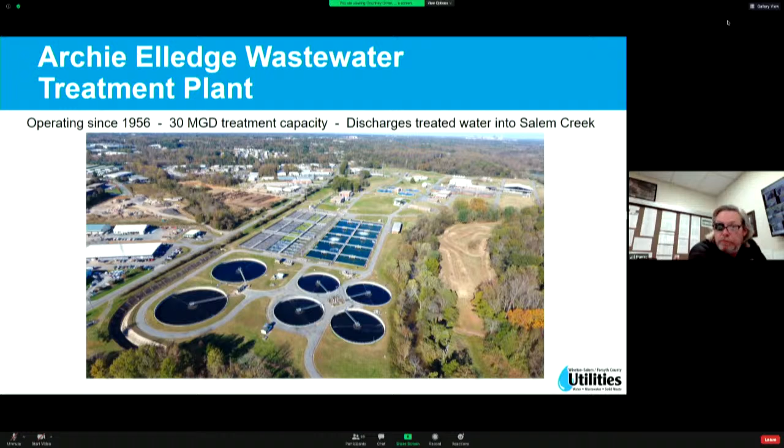The city has two wastewater treatment plants. The first is the Archie Elledge wastewater treatment plant. It's been in operation since 1956 and is currently rated for 30 million gallons a day treatment capacity, and it discharges into the Salem Creek Basin.

The other facility is the Muddy Creek wastewater treatment plant, and it's been in operation since 1986. It's currently rated for 21 million gallons a day treatment capacity. It discharges directly into the Yadkin River.

To talk a little bit about the wastewater treatment process itself, the very first step is what we refer to as preliminary treatment, and it has a couple of steps within it. The first is the bar screen. Just think about it as a bunch of bars lined up vertically in a row, and they catch rags, sticks, all kinds of debris, and an automatic rake will pull that out of the flow and dump it into a dumpster, because we don't want that kind of material moving downstream, tearing up pumps and other equipment. It's best treated by just carrying it, dewatering it, and carrying it straight to the landfill.

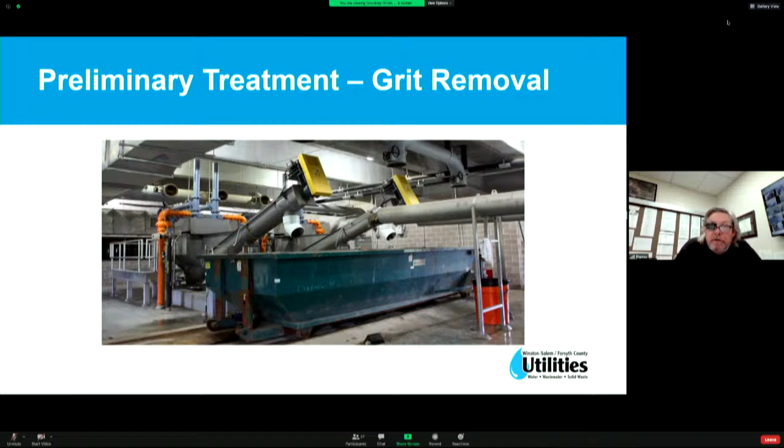The second part of that is the grit removal process, and we use a vortex grit system. Really all we're doing is removing sand, rocks, and inorganic material that passes by the bar screens that we want to get out, because it's also best treated just by dewatering that material, compacting it, putting it in the dumpster you're seeing on the screen, and carrying it to the landfill. After the preliminary treatment process, we go to primary clarification.

Just think about it as a big holding tank where we separate the solids from the liquids. The water that flows through these tanks is generally held for 2 to 3 hours detention time. From there, it will remove 60 to 70% of the total suspended solids, and ultimately about 40% of the biochemical oxygen demand. That BOD is what we use in the trades to determine and classify how strong the waste is coming into the plants.

So by removing with the bar screens, the grit channels, and then primary clarification, by this point we've removed 60 to 70% of the solids that you would see coming into the plant, which dramatically reduces the load on our aeration basin, which we'll talk about in a few minutes. These primary clarifiers also remove any floating oils or grease that come to the top of those clarifiers, and we're able to pull those out, thicken them up, dry them out, and also carry that material to the landfill as well.

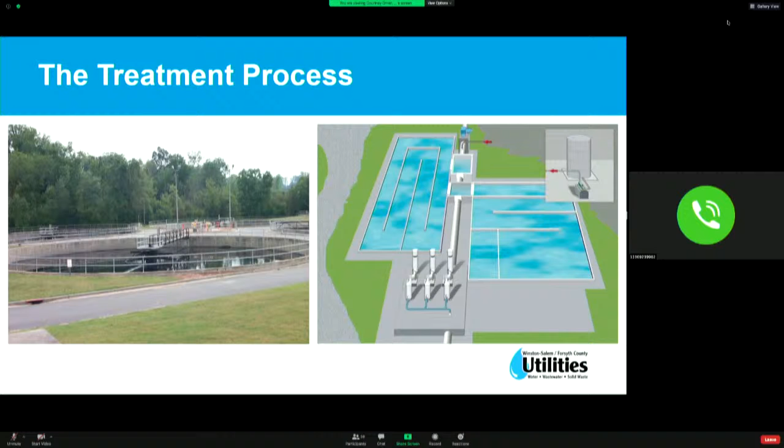So that is where the clear water, after it has been treated, would go to this chlorine contact chamber, where we would add hypochlorite as a disinfecting agent and allow it time to react with anything that may still be left in the flow. Then we will dechlorinate it with sodium bisulfite before we release it out into Salem Creek.

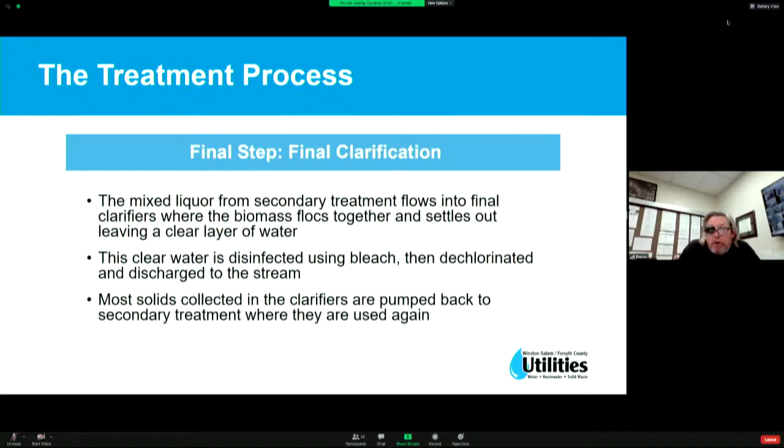That's kind of what we were just talking about there, the final clarification process, where those bugs are settled out and returned back to be reused.

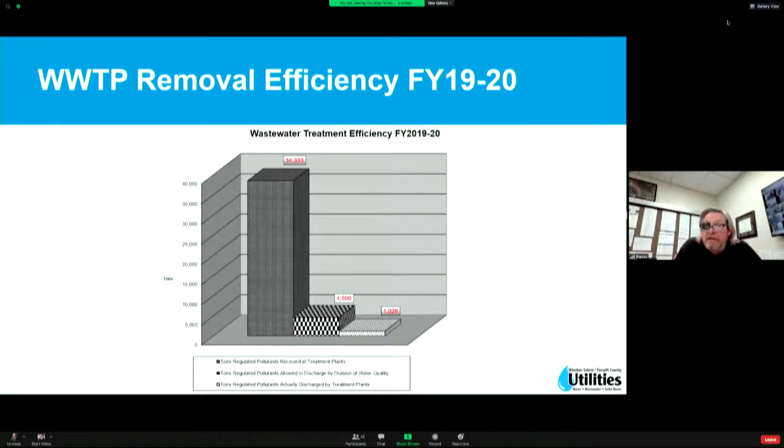Some of the side things we also operate here at the wastewater treatment facility. Of course, we have a biosolids drying facility, where all those bugs and materials pulled out are thickened in a centrifuge and then run through our regional dryer facility, creating a pelletized material which we use as a soil amendment to disperse pretty much almost all around North Carolina.

We also have several support groups. We've got a laboratory on site, and our chemists perform right at 160 chemical analyses each day, which help us maintain proper operations. We also use that information to report back on our state reports, which our lab department creates and submits as discharge monitoring reports, done electronically and kept correct. We also have our own maintenance department and electrical and instrumentation departments on site to help keep the facilities running correctly.

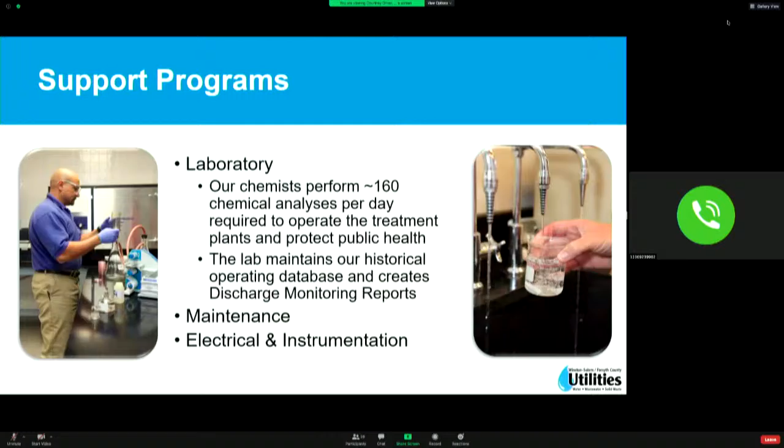The industrial waste control is another department we utilize here. They are tasked with issuing permits and monitoring the discharge from significant industrial users throughout the county, giving them permits on what they can and cannot discharge. They also administer and maintain the grease control program, which you may have heard about with the utilities field operations group. That's where we keep track of food service establishments throughout the county, meeting with them, educating them on the right and wrong way of what should and should not go down the drains, especially fats, oil, and grease, so we don't end up with lines clogging between their facilities and our treatment plants.

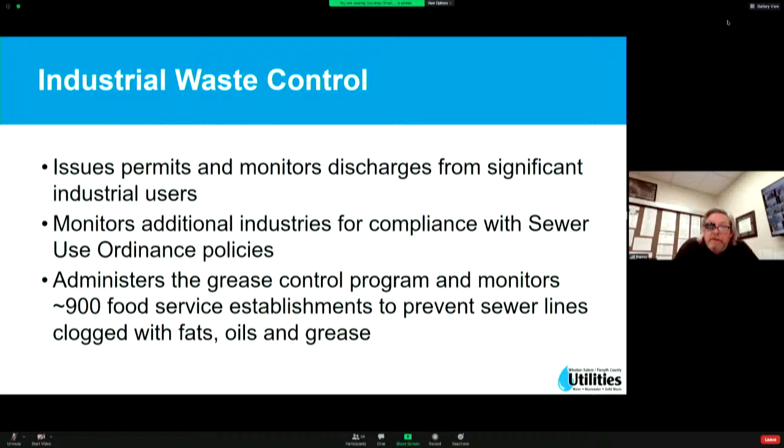Here is some of the educational material we distribute both to restaurants, and if we have a clog in a neighborhood, we will pass out door hangers. We've also gone to the fairgrounds and to a lot of the elementary schools, trying to teach the youth what the dangers are of putting things down the drain, hoping they will carry it home to their parents as well as learning it and keeping that in mind as they grow up.

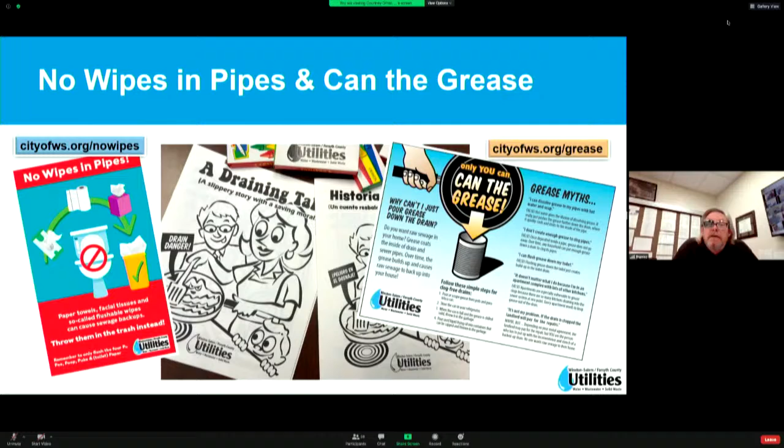Looks like I've spoken so fast, I'm going to get y'all out of here early today. So I think that is the end of my presentation, but I will be happy to take any questions or comments you may have.

Frank, this is Wesley. Where do the bugs come from?

The bugs are naturally occurring, and all we're doing is giving them the perfect environment to thrive and grow, just like a septic tank. Those bugs and organisms will naturally occur over time. So we just want to make sure we give them the right loading rates, the right pH, right temperatures, those type of things to keep them happy, multiplying, and doing exactly what they should, but they are naturally occurring in the environment.

Do you ever have a problem with them multiplying too much? Well, they only multiply based off of the amount of loading or BOD that comes into the plant, and that loading can vary dramatically. That's where our lab is so crucial, giving us results every day. We take that information and calculate the loading coming in and how much wasting we need to do, how many organisms we need to waste back out of the system to maintain proper population.

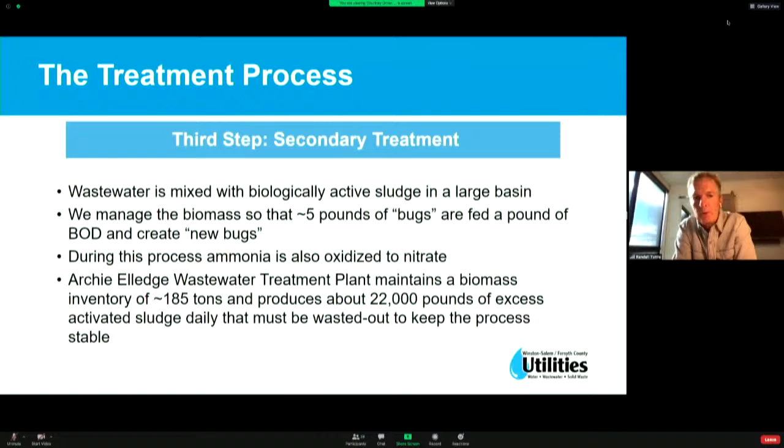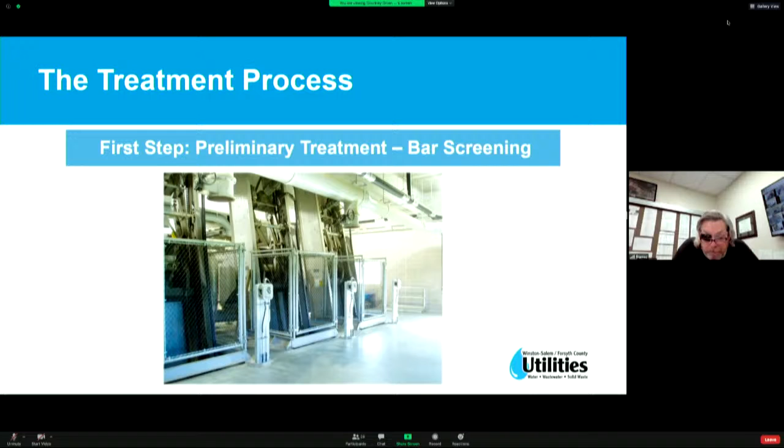So they don't mind being neighbors to us, is sort of my question. They do not mind, but we are getting a lot of new houses building up on that side, which I do anticipate will become more of a problem. I know, and I appreciate it because I'm the guy who gets most of the phone calls. I do appreciate the commission being willing to help us purchase some of the land, especially around the Elledge plant, to prevent or reduce apartment complexes being built right on top of us. Thanks again, always a good job.

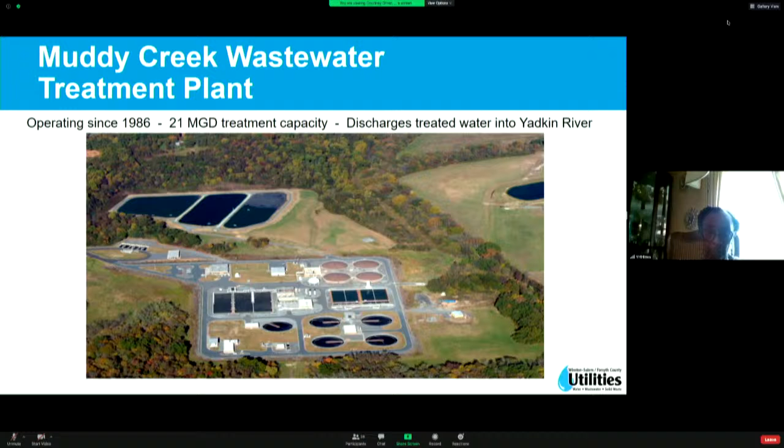Are there any other questions for Frank? Yeah, this is Alan Younger. I have a question related to what you were just talking about, our neighbors. For more than a year, we've had some neighbors of the Archie Elledge plant share their concerns. I wonder what is the update on that and what are the next steps?

I will be honest with you. We have 2, maybe 3 people in the area of the Archie Elledge plant, starting back as far as 2010. They will call sometimes daily, weekly, and then they may not call again for a year or two. There is no rhyme or reason. We have had some issues with equipment, and we fast-tracked a project which just finished up, I guess about a year ago now, with our primary clarifiers to reduce odors there. We think it was very successful.

From a personal note, I do know a person who lives a lot closer, and they said the odors have been a whole lot better. Will the odors always be gone? No, but we are keeping them in check, and usually in the spring and the fall is when we will have odor issues. It's just a temperature inversion - instead of allowing those gases or odors to go straight up into the atmosphere, they get basically a blanket of air that holds them down and lets them float outside of our plant area. That is where we're at, but we have no major odor issues at this point right now.

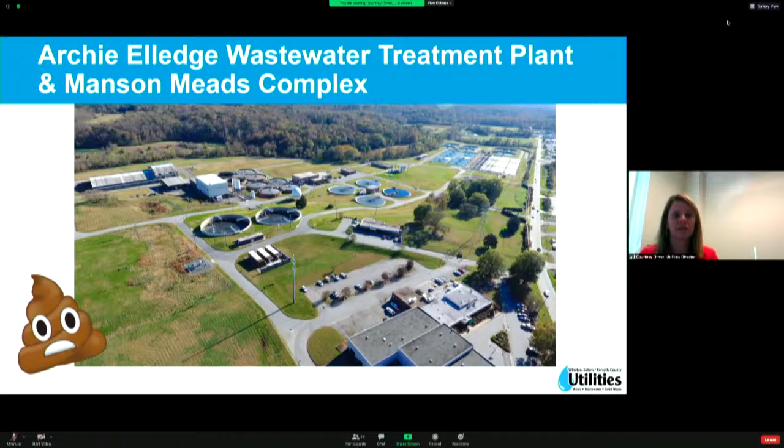Unless you had anything specific for Frank, I do want to say Frank is a really big asset to our department. He's got a lot of experience. He knows the treatment process, and he's a good one to have. So we appreciate everything he does for us. And with that, if there are no other questions, I will keep going.

This is our water and sewer mileage as it compares to what's been permitted. We permitted more water this year than sewer, and it was reversed last year. But we permitted about 15.8 miles of new water extensions and 12.5 miles of sewer.

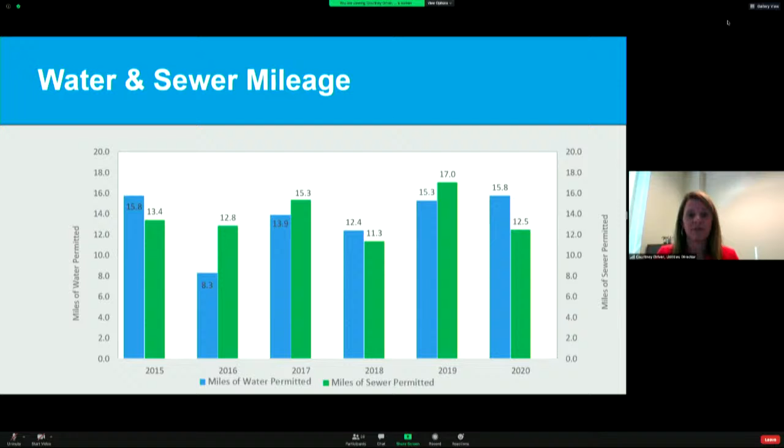As we know, we've had some pretty significant rain events, and that was a good question that was asked earlier. As Frank mentioned, we're seeing huge spikes at the plant when we have these large rain events. So we are trying to look throughout the system to see where we have major leaks that can be repaired. We have our collection system improvement program. We're going to start putting out flow meters in the collection system to see if we can pinpoint where a lot of that inflow and infiltration is coming from.

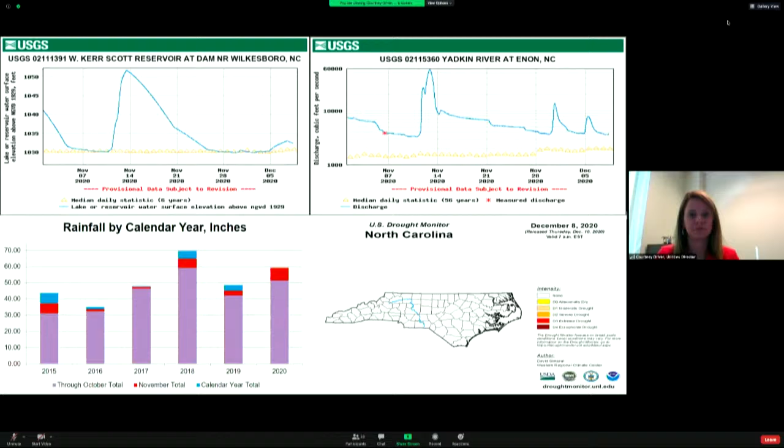So water production, we had a good month. This month our water production was up 2.9% from last November. But overall, the basin received around 7.81 inches of rain in November this year. So as I mentioned, we've seen a lot of rain.

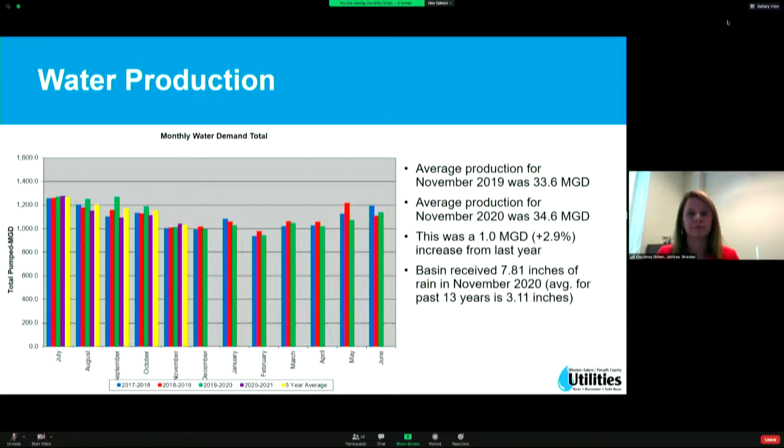This is our water production fiscal year to date. You can see this year we're a little bit lower than we were in 19 and 18, and then lower than we were in 20 as well.

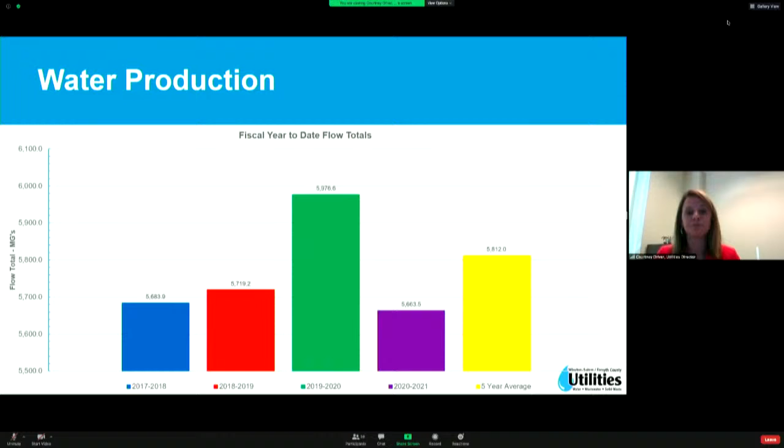Our collection system update. So far we have not received the reports for October or November. I'm pretty sure that we had shown you August and September. We had 2 notices of deficiency, 2 notices of violation, and 0 intent to enforce in August. And then in September, 1 notice of deficiency, 3 NOVs, and 2 intents to enforce that we responded to with the state.

Sewer overflows. So far, we're tracking right along where we were last year. The blue line represents 2020, and our bar graphs, the bars for this current year, are right on track with that. If you remember, we finished last year with the lowest number of SSOs on record. So if we're staying right on that, we're doing pretty good.

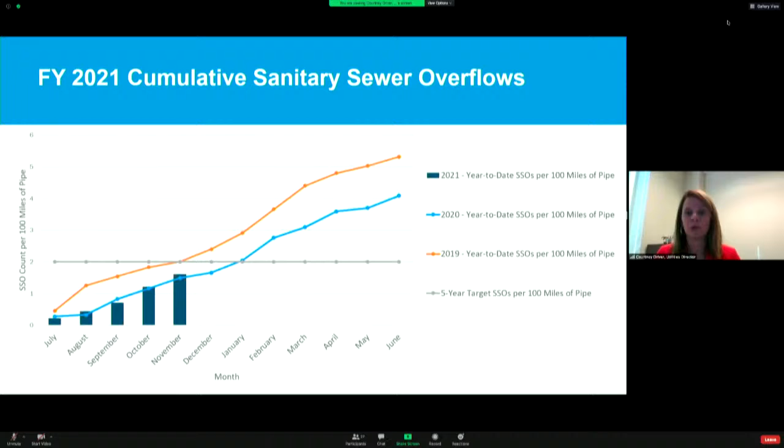This is our overflows by cause. The grayish line is our 5-year average. We did have more SSOs than the 5-year average in October and November, but we did receive some pretty large rains those 2 months as well. Overall, we're doing pretty good. The green, as I said, is a severe natural condition. That was the big rain events that we had in November. We had 2 for that.

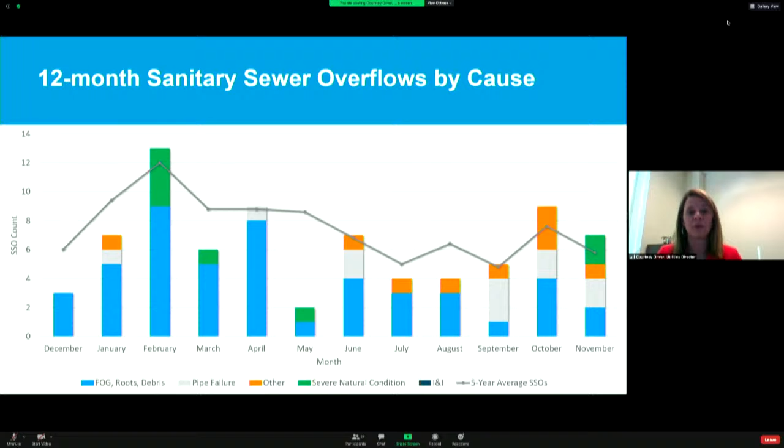Cleaning productivity, we're moving along very well. We're above our monthly permitted cleaning requirement of 10%. We're not quite to our cleaning goal of 20%. Our in-house crews are not cleaning as much as they have been in the past, and our contracted crews are cleaning more. That's primarily because we have some vacancies. We also have the pandemic that we're dealing with, either people that might become sick or they've been exposed to somebody, so have to be quarantined. That's impacting the amount of cleaning that we can do in-house.

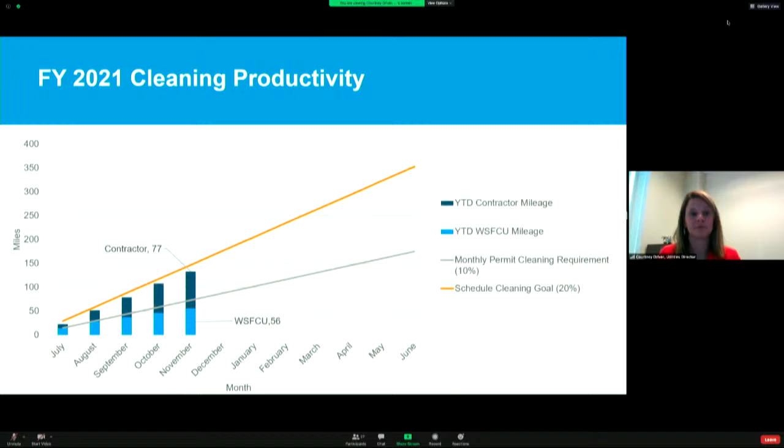Okay, so that's the slides that I have. Does anybody have any questions before Mike gives the financial update? Okay.

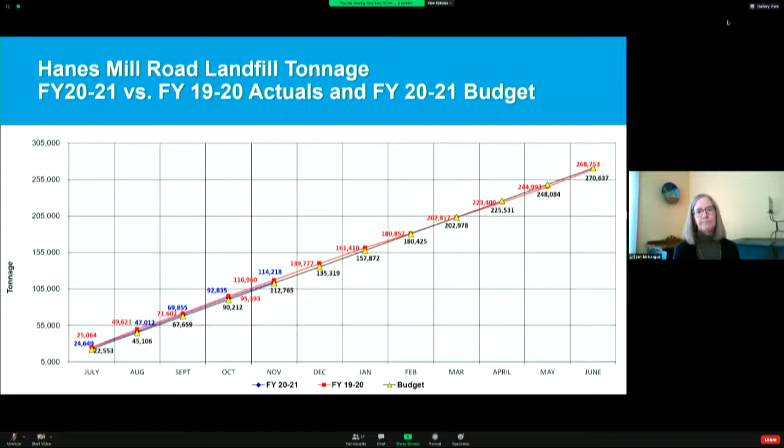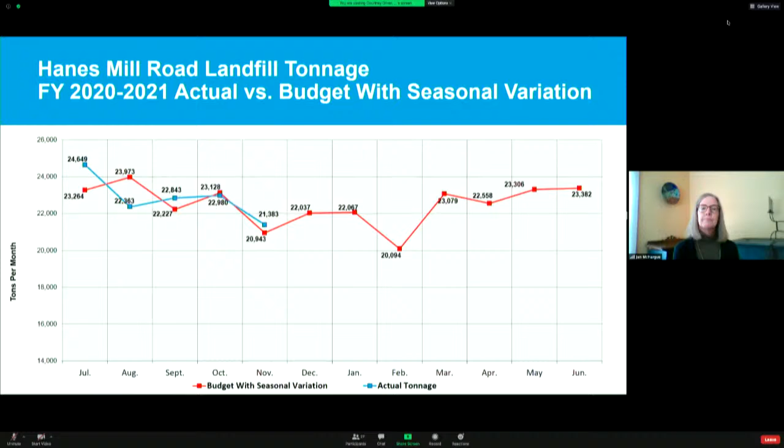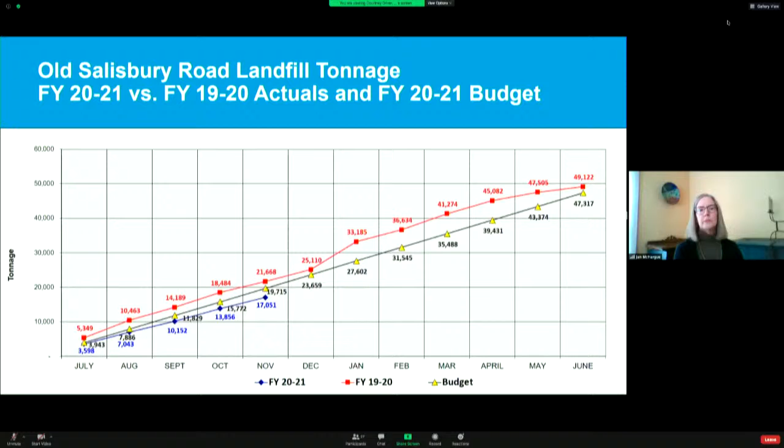Looking at revenues for all solid waste operations, including yard waste, we're at 4.8 million so far this year, behind last year as you'd expect from the tonnage numbers, but right on the budget target, very close. Expenditures are a little above where we were last year, well under budget still, largely due to equipment failures we saw earlier in the year and increased yard waste. We're seeing a lot of yard waste coming in, so sanitation's doing a really good job picking it up this year.

So those are, does anybody have questions about tonnage or revenue, any of those things before we move on to the agenda item? It doesn't sound like it. Of course, you can always ask those later.

Item number 5 on your agenda is to approve a contract for an expansion to the landfill gas system. This would have been a routine periodic expansion, required by federal code and our air permit at that site. But at this point we're also seeing a need to optimize the system because of increased levels of landfill gas being detected moving up through the surface of the landfill. The scope of work includes 7 brand new wells in the active area, replacing, repairing, or dewatering at least that many again, installing pumps, and connecting all the piping, the compressed air line, and the condensate line to remove condensate. All of that's on the active area. On the closed area, there's also work replacing wells and pumps and dewatering wells on that side.

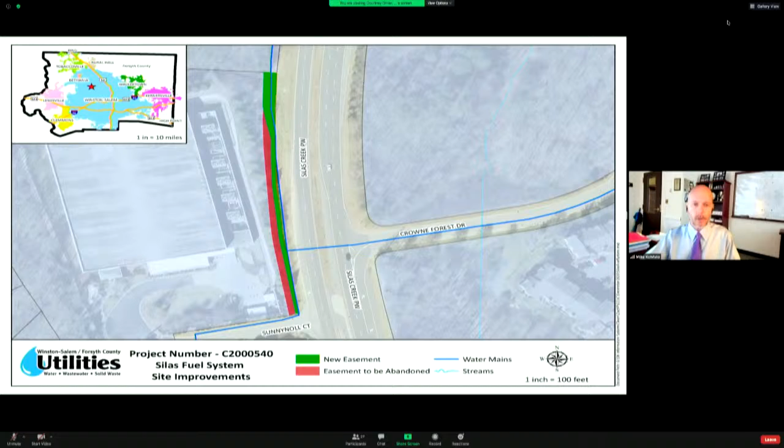Item 2 is consideration of a resolution authorizing acquisition of a water easement by donation for the Silas Fuel System Site Improvements Project. Wells Fargo CPG has plans to construct site improvements on property along Silas Creek Parkway. There's an existing 20-foot water easement within the property to facilitate site improvements, and Wells Fargo has requested the abandonment of the existing water easement. The existing 12-inch water main along Silas Creek Parkway will be maintained within an updated easement, which Wells Fargo CPG has agreed to donate in exchange for the abandonment of the old easement. Staff recommends approval.

Item 3 is consideration of a resolution requesting the City Council of the City of Winston-Salem adopt a resolution authorizing the quitclaim abandonment of a water easement for the Silas Fuel System Site Improvements Project. This item accompanies item 2 and requests quitclaim abandonment of the existing public water easement. Staff recommends approval.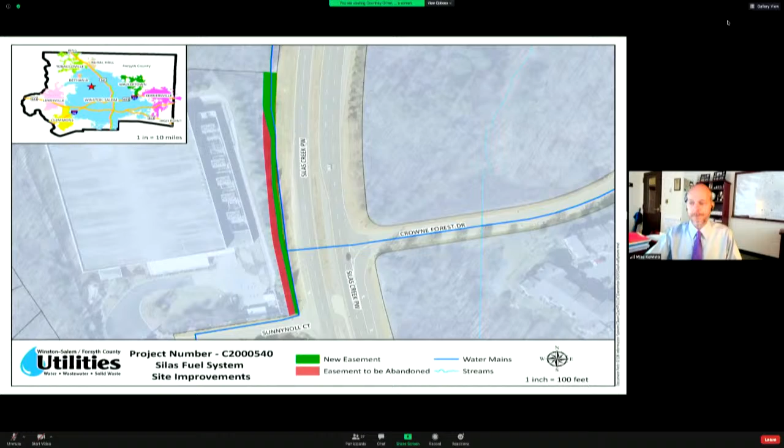Item 4 is consideration of a resolution requesting the City Council of the City of Winston-Salem adopt a resolution authorizing the quitclaim abandonment of a sewer easement for Aspen Pointe. Aspen Point LLC has plans to construct an apartment complex, and a new sewer main will need to be installed as part of the project. A public sewer easement was recorded across this property for future sewer, but the proposed sewer to serve Aspen Point does not fall within this recorded easement. Aspen Point has requested abandonment of the existing easement, with a new easement to be recorded for installation of the sewer in the new location. Staff recommends approval.

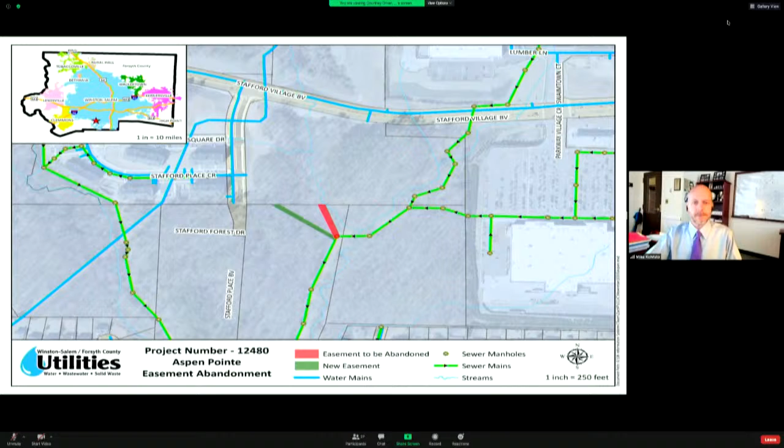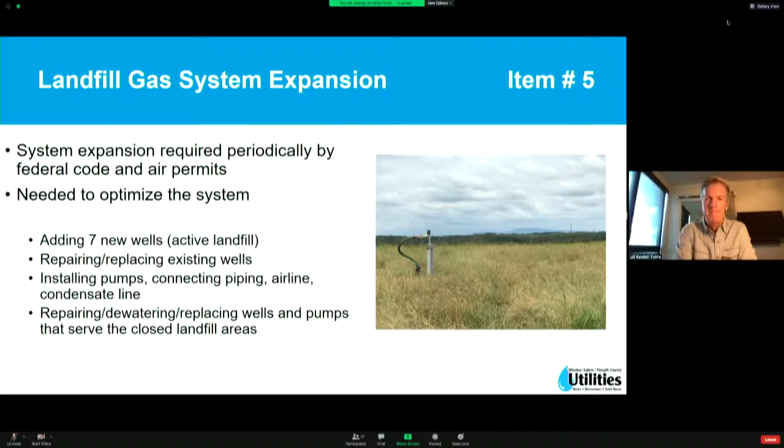Okay, so we're back to item 5. Had some discussion about this. Mike, why don't we? Basically, we're recommending—if we're going to pull this, let's discuss it when we vote on it at that time. Okay, number 6. Moving on—I want to say pull it from the consent agenda. I want to make sure I'm speaking correctly. We're not pulling it, we're pulling it from the consent agenda and discussing it as a separate item. So let's just discuss it at that time.

Item number 6 is consideration of a resolution awarding a contract for fire hydrants. Bids were received November 10th, 2020 for a contract to purchase various quantities and sizes of fire hydrants, with Core and Main LP coming in as the low bidder at $246,090.40. It's recommended that a contract to purchase fire hydrants be awarded to Core and Main LP, the low bidder meeting specifications, in the estimated amount of $246,090.40. I got a question, Harold.

How many hydrants is this, and are they just going to be laying at our utilities yard, or are these going to be planted in the ground? Jerry, do you have that information? I don't have that in front of me. Do you have that as part of the bid? Yes, I have that. It varies by size, of course, and as stated in the document, these are just estimated quantities. We order them as we need them—there's no intention of purchasing all of these and storing them in our warehouse. They'll be released as needed. For example, there's a quantity of 25 at 36-inch diameter, 40 at 42-inch, 25 at 48-inch. That's the typical quantities.

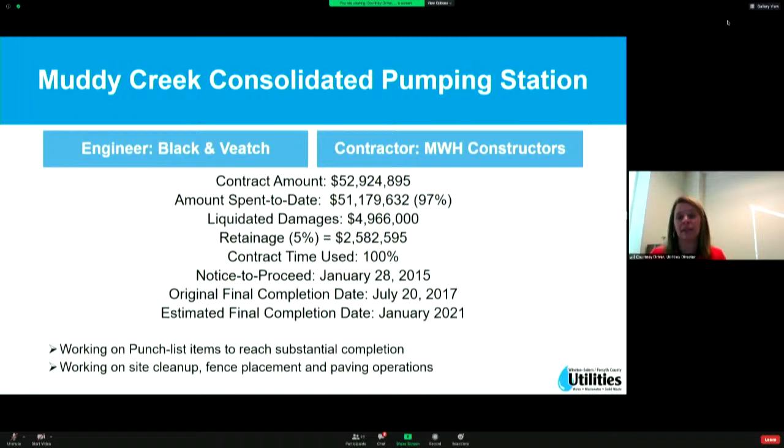I think he's had some questions about the contract. I don't know what his involvement is or what the office's involvement is, but yes, I think he has had some questions. Okay, so it sounds like we are going to get a presentation in the March meeting. Is that right? Yes.

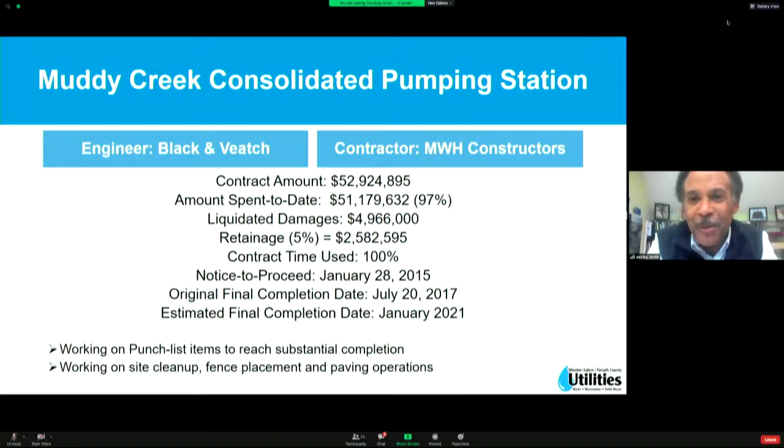Good. I think it's probably at this point, especially since Marlena's not on, a good point to just stop discussion on that, so we don't get anything said on the record that may come back to bite us. Go ahead.

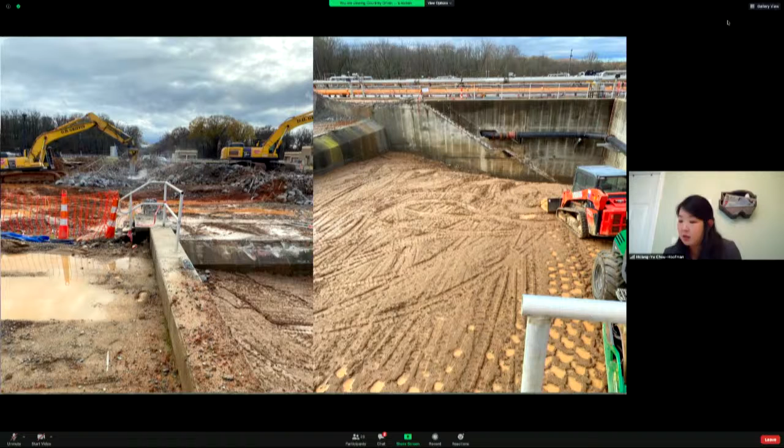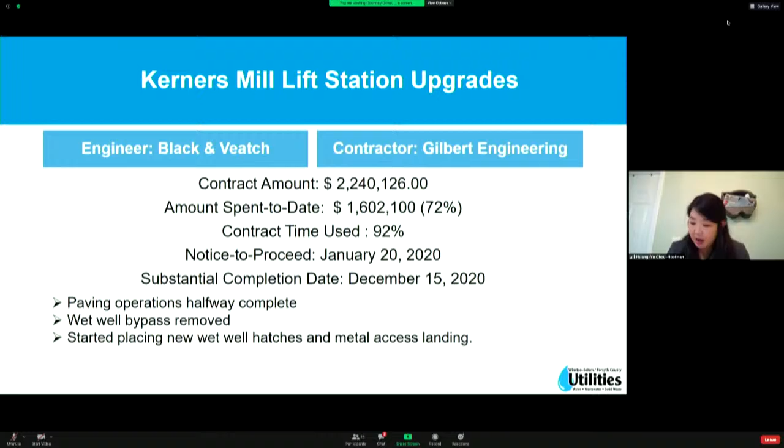Kerner's Mill lift station: we are on track to reaching substantial completion this month. The wet well bypass has been removed and they've begun paving operations.

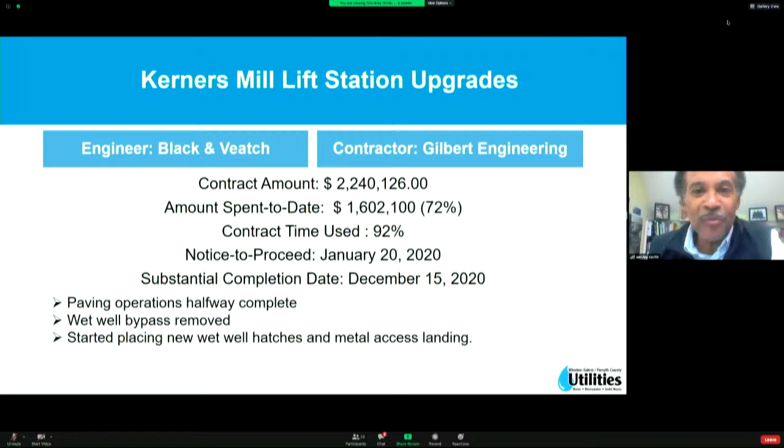So hold on just a second. Do we want to go through all these now, or just go through the one we showed earlier, Courtney? Just trying to recognize everybody's time. I would say we can go through the rest of them, or we can go ahead. It's up to the commission, whatever you want to do. If anybody's interested in the AMI project, we had some slides on those as well. I know I sent out an email, so it's really up to the commission. I know we've gone a little over time. If there's anybody else on the commission that has to go, we understand. You can just put in the chat that you've got to leave. But another 10 minutes, let's just move on then. Okay, thank you for your time.

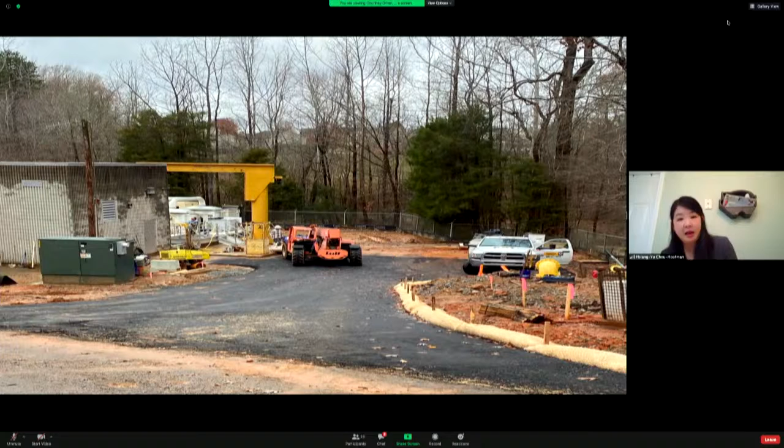Go ahead, Shane. Oh sorry, I thought that's getting me. I'll try to talk really fast. Here is a picture of the contractor working on paving the site, so we're getting closer to finishing up.

Roswell Lift Station: notice to proceed was February, and substantial completion will be February of 2021. Electrical work has been completed, and the gravity sewer has been installed at Browns Run and Linville Spring.

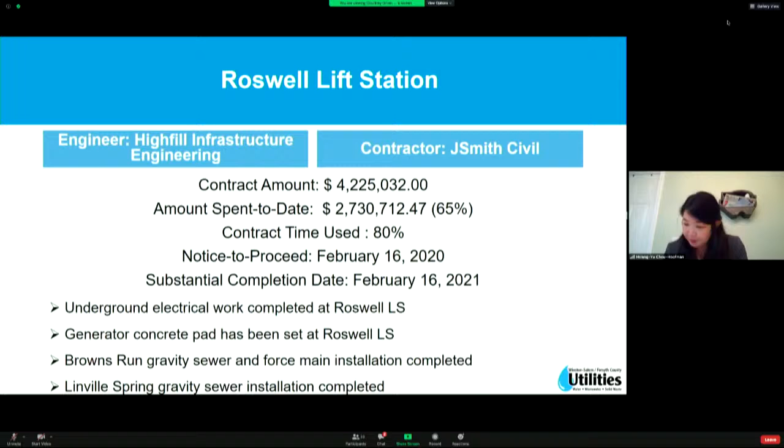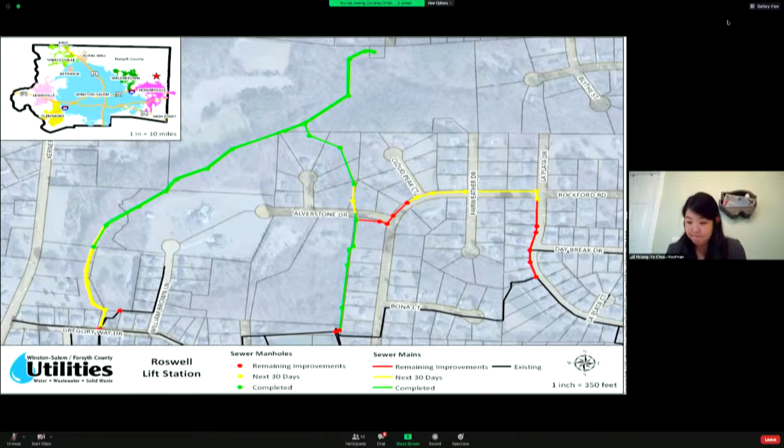Here is the progress map for this project. The green is everything they've completed, and yellow is what they're currently working on. For North Mill Creek, Zachary hired a new subcontractor named Bruce Allen to help install the 42-inch pipe to help them catch up on the previously slower progress. Zachary is also working on a 36-inch pipe.

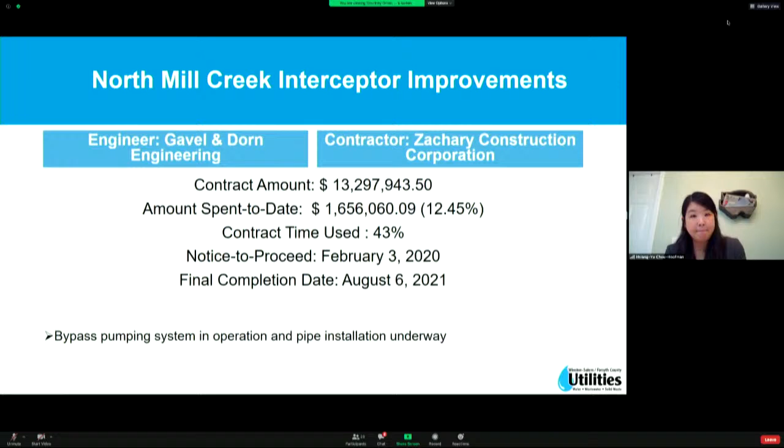Okay, so Mike can wrap us up. We just have a few more slides on that. Thanks, Courtney and Shane.

We've installed 60 meters. We've installed the radio base station, and the meters are communicating with the network. So that is good news.

The beta initial deployment is approximately 10,000 meters. The contractor has started the meter box inspections and will begin box and lid replacements needed shortly. Meter installations are scheduled to begin on January 11th. Letters will be sent to customers this week notifying them of the work to be done.

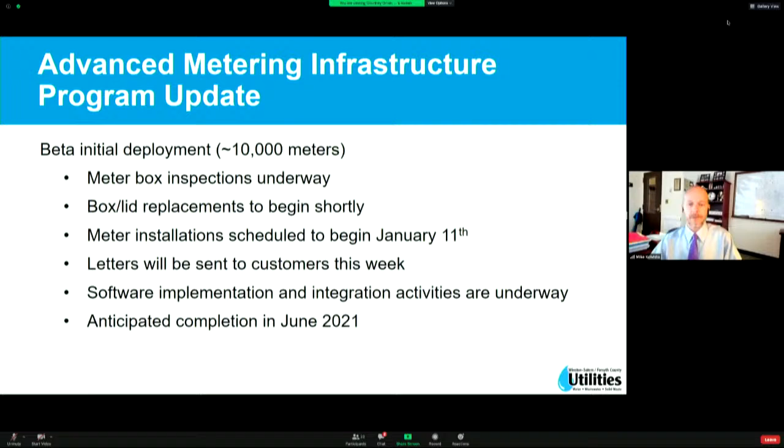We've started the software implementation and integration activities with Sensus and our other vendors involved. The anticipated completion of the beta initial deployment is sometime in June 2021, is what we're thinking right now.

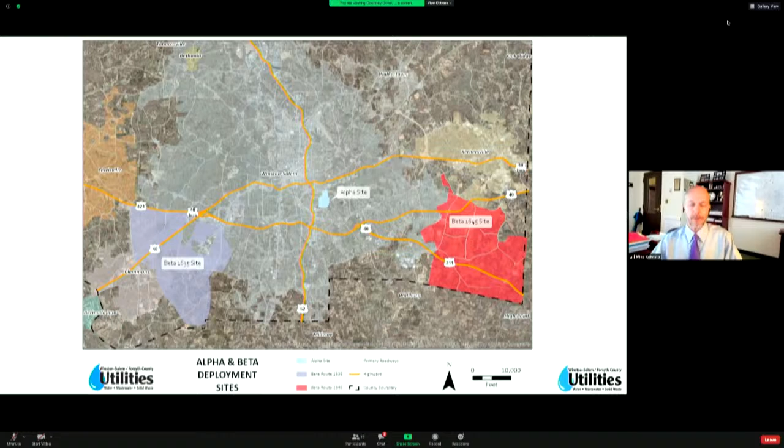Here's a map. The beta deployment areas are in the southeast and southwest areas of the county. These areas were chosen because they're 2 of our more difficult routes to conduct manual meter reading. It also covers different jurisdictions and gives us a good idea of the existing conditions of what we'll see when we move into full deployment.

We also wanted to update you that we're finalizing the radio tower locations. There are 29 locations located throughout the service territory. We're using existing infrastructure where possible, and other sites are currently being finalized. A couple of those may go to the Planning Board and Board of Adjustment.

We have also terminated our agreement with our program management consultant, and we'll be issuing a new request for proposals likely this week. That was UtiliWorks, and after we engaged with Sensus, we felt like we needed a change. Our new RFP will reframe the type of project management and technical support that we'll need based on what we're seeing now that we've engaged with our AMI vendor, which is Sensus.

So I'll stop there if there are any questions.

If there aren't any, I know we're running late, but I would really like to thank the staff that has worked on this AMI project. They've done an amazing job. This project is complex enough to do in a non-pandemic environment, and almost everyone on our team has a full-time job in addition to trying to implement this project. I just have to commend our team's efforts here at the end of the calendar year. They have done a remarkable job. Sorry, thank you, I'm done talking.